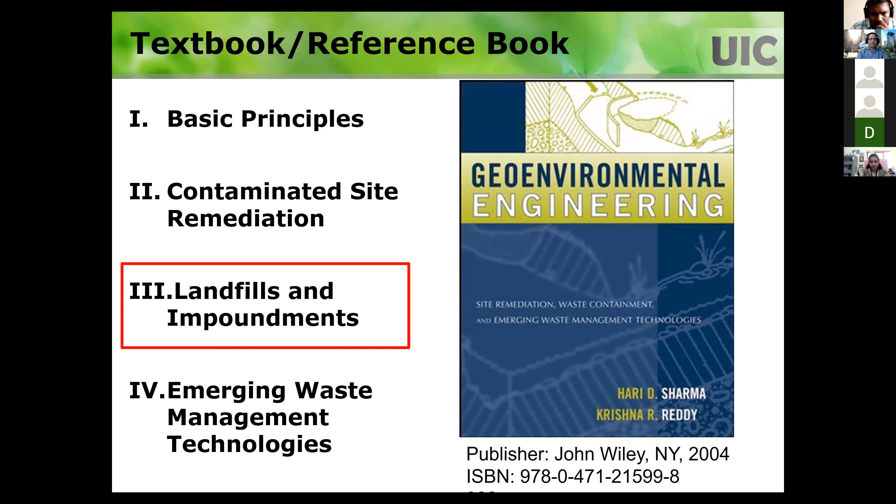And this short course is to deal with the landfills and impoundments, which is in part 3 of this book. In part 3 of this book, these are the chapters. Chapter 15, sources and characteristics of the waste; landfills regulations, siting and configurations; waste containment liner systems; leachate collection and removal systems and liner design; final cover systems; gas generation and management; groundwater monitoring; surface impoundments; beneficial use of waste materials and recycling; end use of closed landfills; bioreactor landfills.

So the way these chapters are organized is, these chapters go in a logical sequence. First of all, you need to know what is the waste, then you need to know the regulations, siting, and you need to know about liner systems, leachate collection systems, final cover systems. So it provides a logical sequence of the topics. So if you're not familiar with landfills, this is the good way to get everything organized.

Because even when I was a student, my professor, the first day he was talking about the liners, and I didn't have any idea before what it takes to study landfill liners. So you need to have a lot of background about types of waste, regulations, the requirements and so forth. So in case you are trying to teach this as a course, I highly recommend you to follow this logical sequence. And I teach a course called Design of Landfills and Impoundments at my university. I actually talk about all these topics. So this is my course syllabus.

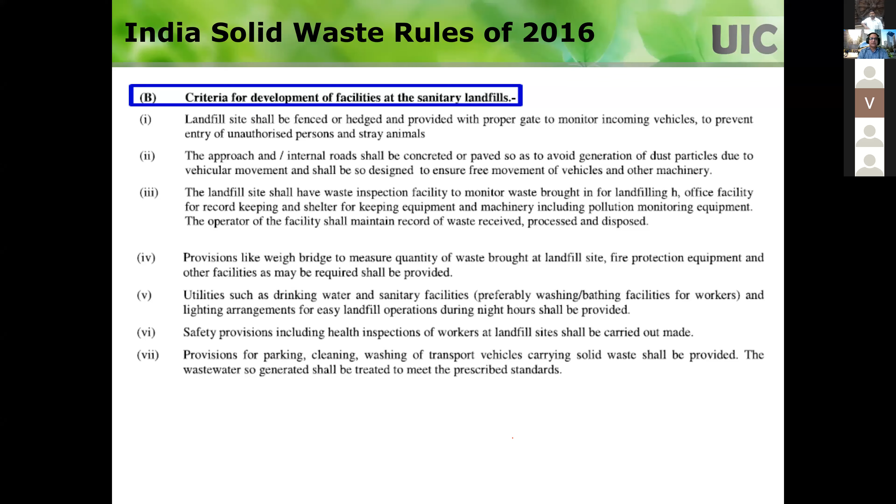And these are all the things that I mentioned: criteria for water quality monitoring, criteria for ambient air quality monitoring, criteria for plantation at landfill sites, criteria for post-care, closure and rehab of old dumps. So you need to have an idea of what the central government and the Central Pollution Control Board regulations are. So I want everyone to read this. Anyone working on landfills in India, students, researchers, practitioners, must know these rules.

From working in this field for many years, I'm not sure about the scientific basis for some of the rules. In my opinion, some rules seem to be questionable, but those kinds of things happen in every situation. Now, I'm more familiar with the U.S. laws, so you can compare and contrast. The best thing you can do is read about the Indian rules and regulations, then compare with the U.S. regulations and see where the differences are. That would be a good exercise for students.

So this is the definition of solid waste according to the US EPA. In the physical sense, you think solid waste means solid, right? But that is not true according to this definition. Solid waste includes solids, liquids, semi-solids, even contained gaseous materials. I always have a hard time when I explain the solid waste definition in this course. Solid waste doesn't mean it's a physically solid thing. It could be liquid or semi-solid. That's the definition the US EPA has, and we follow that in the US for our practice. So don't take it literally that solid waste means really solid.

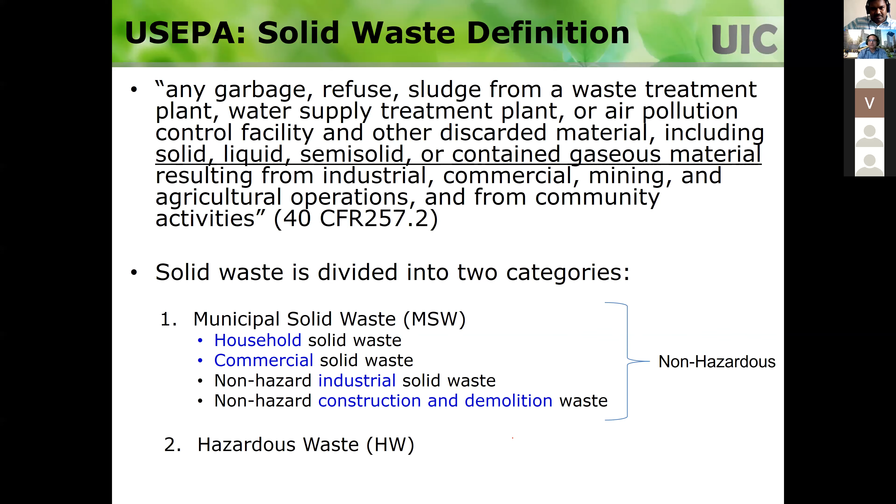Solid waste is a very generic term, and it can be divided into two categories. One is called municipal solid waste, which could be coming from households, commercial facilities, non-hazardous industrial, and non-hazardous construction and demolition waste. All that combined together you can call municipal solid waste. If it is not municipal solid waste, then it's hazardous waste. So you have only these two choices: municipal solid waste, non-hazardous, versus hazardous waste. We don't call it non-hazardous waste, we call it municipal solid waste. You need to be very clear with this because it makes a huge difference in how you manage this waste.

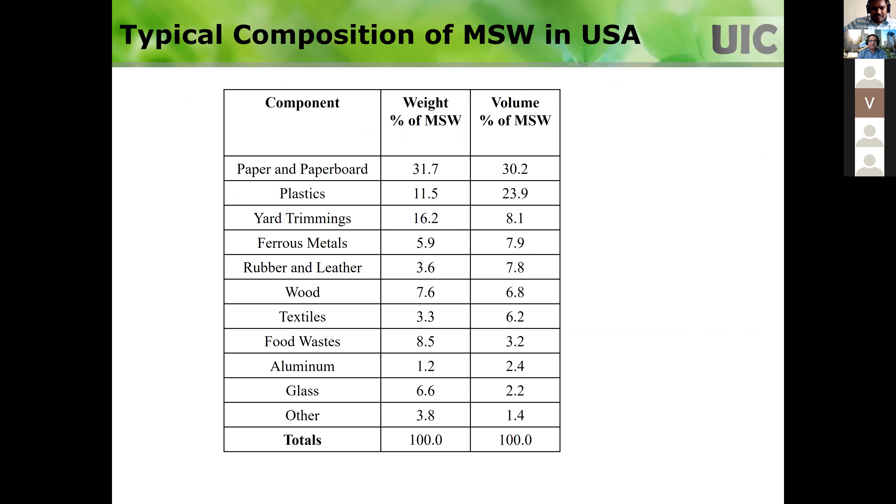So this is typical composition of municipal solid waste in the US, and you can find these numbers changing depending upon the source you look at. You will have these kinds of numbers for every other country, this is just an example. So now the question is, how do I know if the waste is hazardous or non-hazardous? Let's say I don't know where it came from, or it came from all kinds of industries and it's mixed stuff. How do I know? So US EPA has given this definition of what hazardous waste is.

So what we do is we do this test and see if it meets these requirements, then we call it hazardous waste. If not, we call it non-hazardous waste. So what are the things that you should look for to characterize the waste, to determine if the waste is hazardous or not? If one of these criteria follows, then it's called hazardous waste.

Well, first thing is ignitability. You need to look at it, if the waste is ignitable. Second one is corrosive. Is it corrosive or reactive or toxic? So if any of these characteristics are exhibited by your waste, then it's called hazardous waste. Not necessarily all of them have to be followed. If it is ignitable and everything else is fine, then it's still called hazardous waste. So the point, I hope I made it clear, any one of the following characteristics, it could be all of them, or at least one of them, then it's hazardous waste.

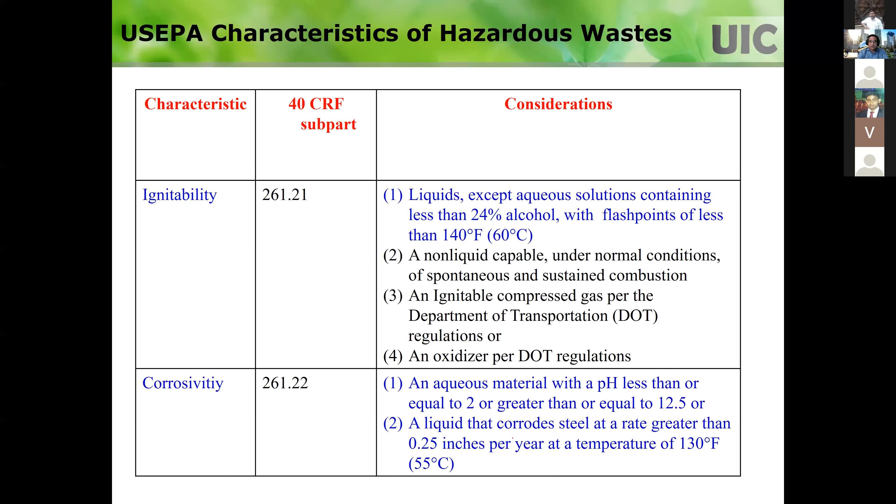So how do we test these characteristics? First one is the ignitability. So you look at this one. There's more explanation here. For example, flash points of less than 140 degrees or 60 degrees centigrade, then it's ignitable. Corrosivity, you can see pH is less than or equal to 2 or greater than or equal to 12.5, then it's corrosive. So it automatically becomes a hazardous waste. Okay. So if one of them is satisfied, you know that it's hazardous waste.

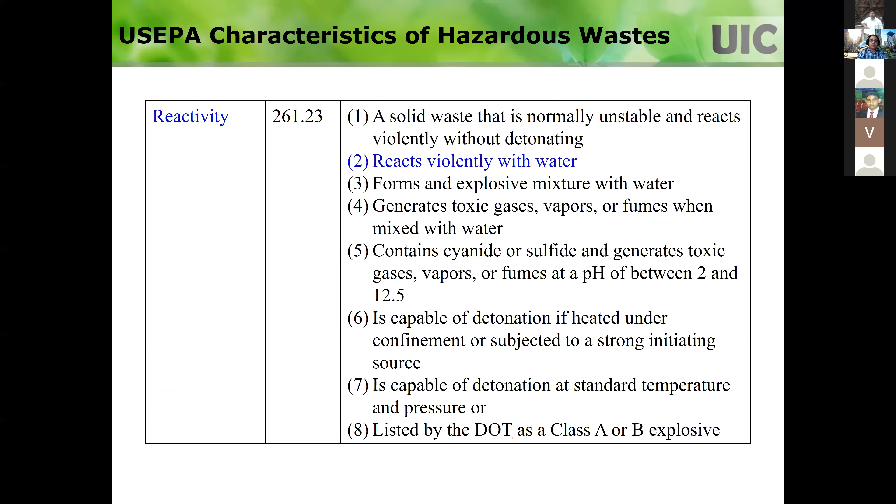But let's say these are okay. Then you look at reactivity. Again, I've given you the description about how you test for reactivity. So in common sense, if it reacts violently with water; there is a descriptive way of how you characterize the reactivity. And then the last one is the toxicity. How do you check the toxicity? You do the TCLP test, toxicity characteristic leaching procedure test. This is the procedure in the table. This goes in details. Everybody knows what the TCLP test is these days.

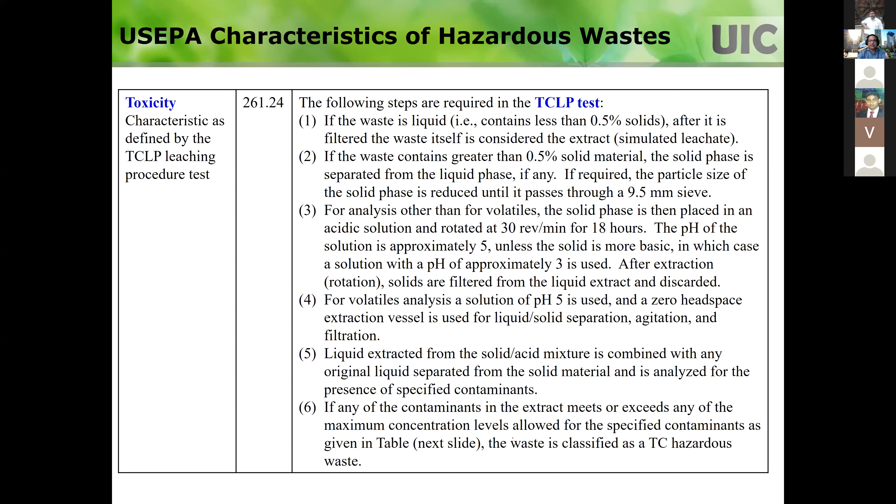So not all of them, even one, for example, lead, right? If the lead concentration is more than 5 milligrams per liter in your leachate, then it becomes a hazardous waste. Let's say everything is fine, except the leachate concentration is more than 5 milligrams per liter. So it becomes a hazardous waste. So then you cannot use the municipal solid waste landfills. You have to send this waste to hazardous waste landfills. So it's a totally different game that you have to play depending upon whether the waste is hazardous or non-hazardous. So the municipal solid waste is the non-hazardous waste that comes from residences, industries, institutions and other things. So we have an engineered waste containment system.

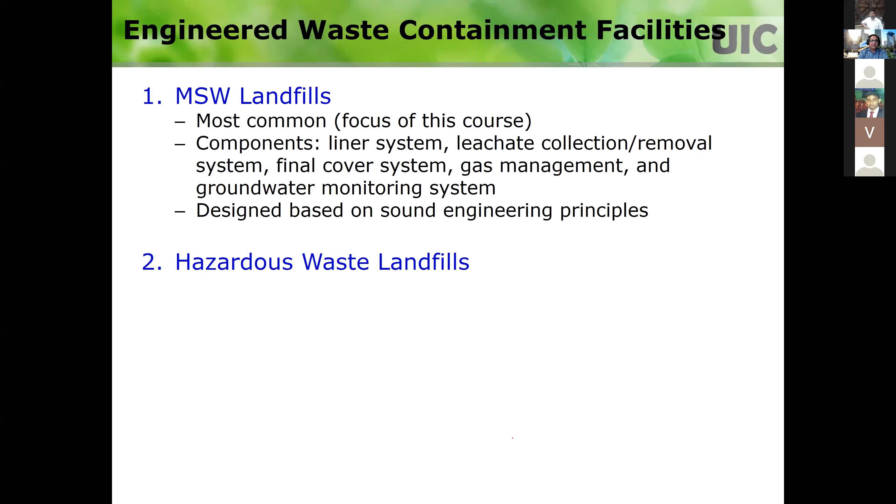So MSW landfills have a liner system, leachate collection and removal system, final cover system, gas management system, and groundwater monitoring system. As per the regulations, you need those things. This is not my way of thinking that these are good for a landfill to have. No, these are the minimum requirements that you have to have. And you have to design all these things based on sound engineering principles. So if the waste is characterized as hazardous waste, then you have to do all these things that you do for municipal solid waste landfills.

But you have to introduce a lot of redundant design. Instead of a single composite liner, you have to have a double composite liner in hazardous waste, because you don't want to take any chance of the contamination going into the subsurface. So basically, you follow the same design methods as municipal solid waste landfills, but you introduce a lot of redundancy. In municipal solid waste landfills or hazardous waste landfills, you cannot dispose of liquid waste. MSW landfills, you cannot have liquid waste. So if you have a liquid waste, the only way that you can dispose of it is in surface impoundments.

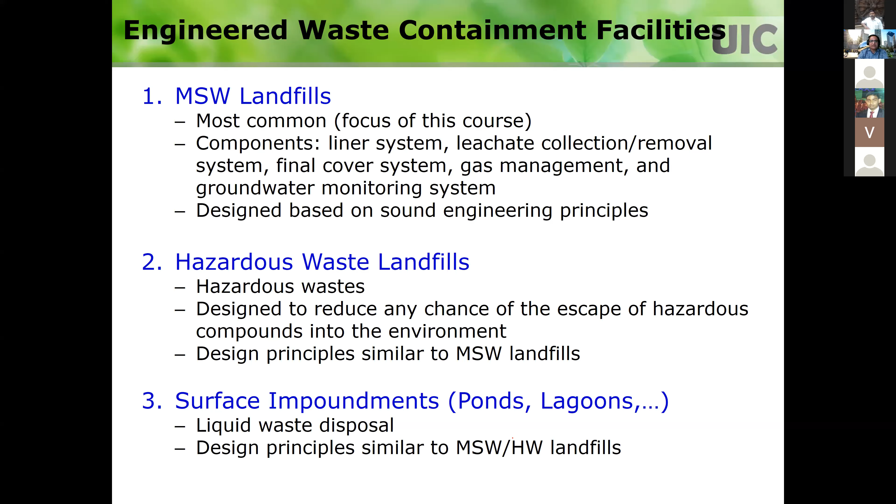So MSW landfills and hazardous waste landfills will not accept any waste that has excessive moisture. They do the paint filter test, and if it does not pass, then you cannot dispose of that waste in a landfill. So if you have liquid waste, then you have to put it in surface impoundments, or there's different terminology for these: ponds, lagoons, different things.

Just showing the schematic of what a municipal solid waste landfill looks like. Let's say you have a geological formation like this one, and then you have a liner system at the bottom. You excavate down depending upon how much capacity you need, then you construct the liner system, then you have a leachate collection system, and then you fill in the waste. That's called operating conditions.

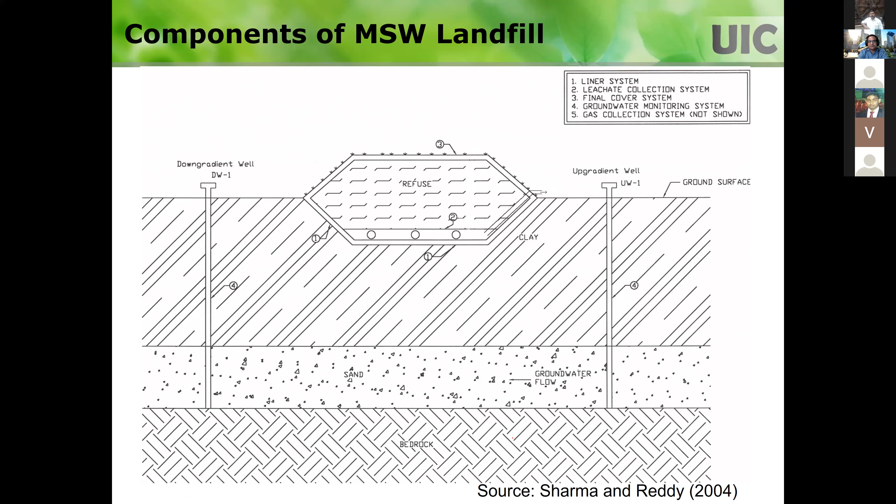Once you fill it up, then you close it with the final cover, and you always have to monitor the groundwater at the site, even before you start constructing the landfill, to establish the baseline groundwater conditions. So you will have a set of monitoring wells on the downgradient side and one set of wells on the upgradient side, so if there is any leakage from the landfill, you will be able to detect it. And you also have to have gas collection and removal systems. Okay, so those are the typical things.

So just like the solid waste rules of India, the Subtitle D regulations of RCRA also have specifications on the minimum requirements for municipal solid waste landfills. I'm not going to focus on hazardous waste landfills and impoundments. Basically, if you know how to design a municipal solid waste landfill, you could apply the same engineering principles to design hazardous waste landfills and impoundments. A lot of times in my courses, I spend a lot of time on municipal solid waste landfills, and then at the end I tell how you change things for hazardous waste landfills and impoundments.

So these are the requirements that you see in the specifications. As I mentioned, this would be our starting point. This is my building code, right? The code that I need to follow for designing a landfill. These are as per the US EPA, but you have the same kind of things in the Solid Waste Rules of 2016 in India. So the location restrictions: where can you have a landfill? It's called locating a landfill or siting a landfill. So you have to follow these requirements.

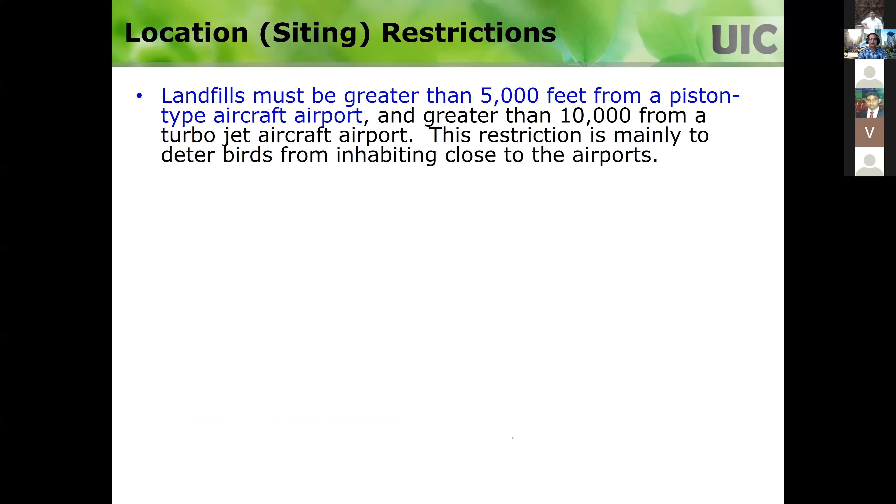For example, in the US, you cannot have any landfill within 5,000 feet or 10,000 feet of an airport, depending upon the flights that come in. Landfills should not be located in floodplains. Landfills must not be located in wetlands. It will give you all these things. Must not be located within 200 feet of a fault area. Landfills cannot be located in seismic impact zones, because you have seismic conditions. Landfills must not be located in unstable site subgrades. So you have all these requirements on where to put a landfill, and you have to meet them.

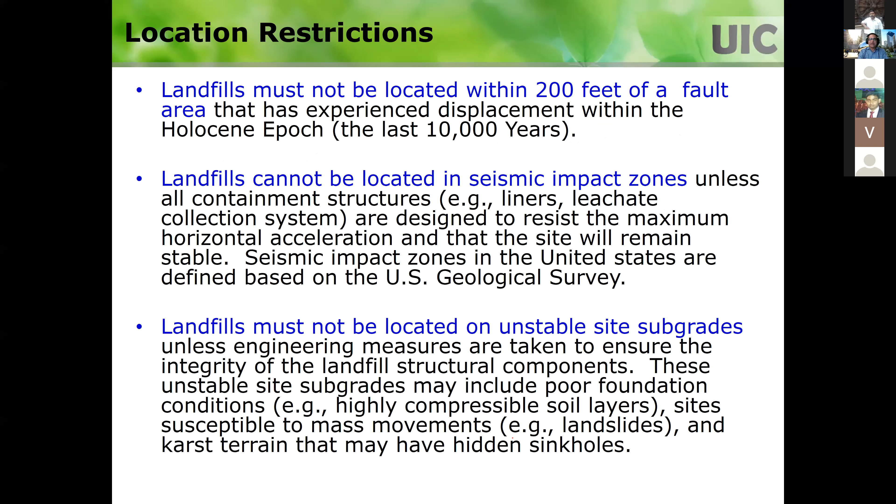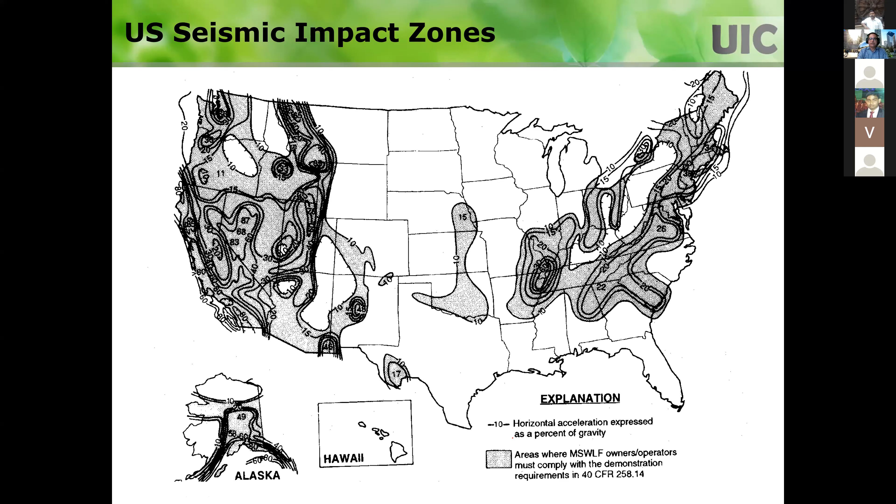For example, seismic impact zones: every country has seismicity maps. This is the map of the US, showing the seismic impact zones. If you have a landfill in non-seismic zones, then you don't have to worry about it. These shaded areas are seismic impact zones, so if you have a landfill in those locations, then you have to do the stability analysis for seismic conditions. The regulations tell you what extra analysis you have to do. And those are the federal regulations.

Federal regulations are like central government regulations in India. Then states could have different regulations. I live in a state called Illinois, and Illinois has different regulations. I don't have to go into detail, but these are stricter than the federal regulations, or have additional requirements. So the federal requirements are compulsory, and you can have stricter or additional requirements at the state level or even the local level. For example, if I'm going to have a landfill in Hyderabad and the Hyderabad Municipal Corporation comes up with additional requirements, then those also have to be followed. So that's about location requirements.

Operating criteria: you cannot accept hazardous waste, even by chance. So there should be certain testing protocols to make sure of that. First of all, you need to look at the source.

If you have an unknown source, then you have to analyze if the waste is hazardous or non-hazardous. Only non-hazardous waste is taken in a municipal solid waste landfill. So if it's a hazardous waste, then you send it to a hazardous waste landfill. A hazardous waste landfill is built with a lot of safety precautions, so it costs a lot of money. So they have a tipping fee, right? In the US, every time you take the waste to a landfill, they charge you by weight. So hazardous waste costs a lot of money to dispose compared to municipal solid waste.

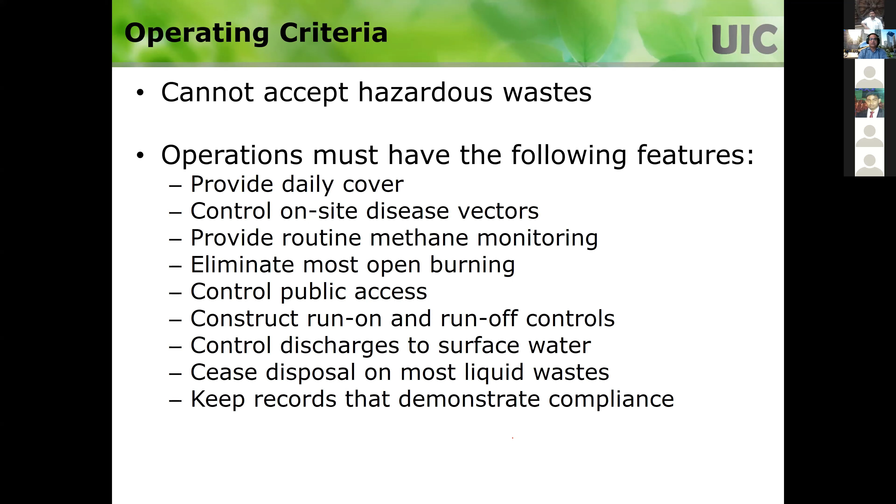So you need to keep records that demonstrate compliance. So these are all the requirements put on the operator, and the operator has to conform to these operating requirements. Again, it's not an option, it is by regulations. If the operator is not following any of those operating criteria, he or the company will be shut down, or they will be responsible for all the damages, and sometimes they go to jail also.

So, design criteria. The most important design criterion is the liner system. I know a lot of people do research on liners, okay? And the first thing that I will tell them is, look at what is the requirement for the liners. Don't randomly do research on liners without knowing what is the minimum required, right? So in the US, and many countries adopted a similar thing, basically we need 2 feet of compacted soil with less than 10 to the power -7 centimeter per second. We use the feet system, so you can convert this to maybe 0.6 meters.

And then on top of it, you need to have a geomembrane, a flexible membrane; if it's HDPE, 60 mil minimum. And then you need to have a leachate collection system on top of it. Basically, you have a drainage layer or the pipes. It doesn't really say anything about this one. So what is in the regulations is this, okay? You need to have a flexible membrane liner. You need to have a compacted clay liner. You need to have a leachate collection and removal system.

It doesn't say what it should be, but it should ensure that leachate does not accumulate more than 1 foot, 30 centimeters, above the liner at any time during the entire life of the landfill. So typically we will have a drainage layer, a set of pipes, and a system to collect and then remove the leachate, so that we have a 30 centimeter or less leachate head throughout the entire landfill. So this is what you need to look at. If I'm doing research on it, what can I do better than this, right?

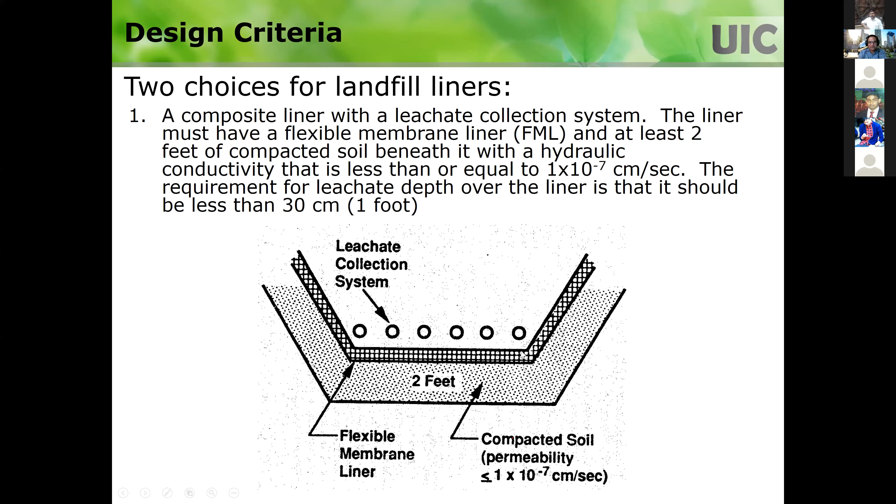Whereas if the shear strength is not enough, you can do something. You can flatten the slopes, do something for that one. But permeability is a requirement that you cannot do much about. So you have to make sure that your material has that permeability. So they give you a second choice. So I like these regulations.

Okay, regulations give you the prescriptive solution, kind of what is the standard solution that you start with, but also they give you the option. Okay, this is the second choice. In the second choice, the regulations don't want to say anything about the liner system. You come up with whatever you want, right, as a liner.

But the only criteria that I have, and I'm talking from the regulatory agency point of view that is seeing your design, they say that, okay, this is my compliance boundary. Generally, it is the waste boundary or 100 feet or 500 feet from the waste boundary. That's my compliance boundary. So if I draw a line, go down to the uppermost aquifer, and then look at this point, that's my compliance point.

So I need to demonstrate that at this compliance point, my contaminant, for example, if it leaches and goes down, and then in the groundwater it might flow horizontally, when it comes to this compliance location, concentrations do not exceed these standard levels. So these regulations tell you these are the contaminants and these are the concentrations. So you come up with whatever you want. So I love this option, right?

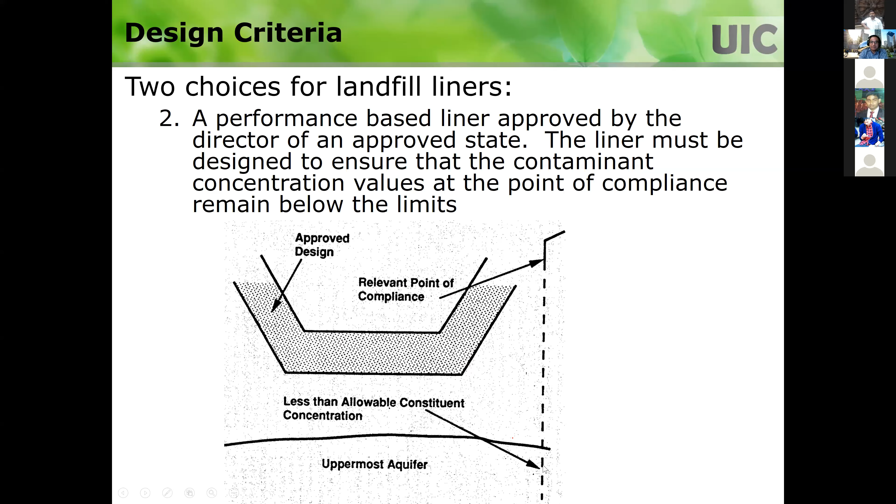So then groundwater monitoring and corrective action. The uppermost aquifer is the most important one. You want to monitor it all the time. So you need to have a set of monitoring wells, and you need to have a sampling and analysis program. And they tell you what kind of chemicals you need to analyze. It's called detection monitoring. And then if you find some chemicals exceeding certain levels, then you go into assessment monitoring. In assessment monitoring, you need to add more chemicals and monitor those things, and then do the statistical analysis.

And if you see that these chemical concentrations are exceeding in the groundwater, definitely due to leakage from the landfill, then you need to have a corrective action. Corrective action is remediation of the groundwater. So you really need to do something. In landfill cases, once you fill in the waste, you cannot do anything to the liner. So a lot of times you have to put in slurry walls or other things. So that's why you need to be extremely careful in the design of landfill liners, because there is no second chance to fix it. Because once you put in a lot of waste, how can you go back and replace the liner?

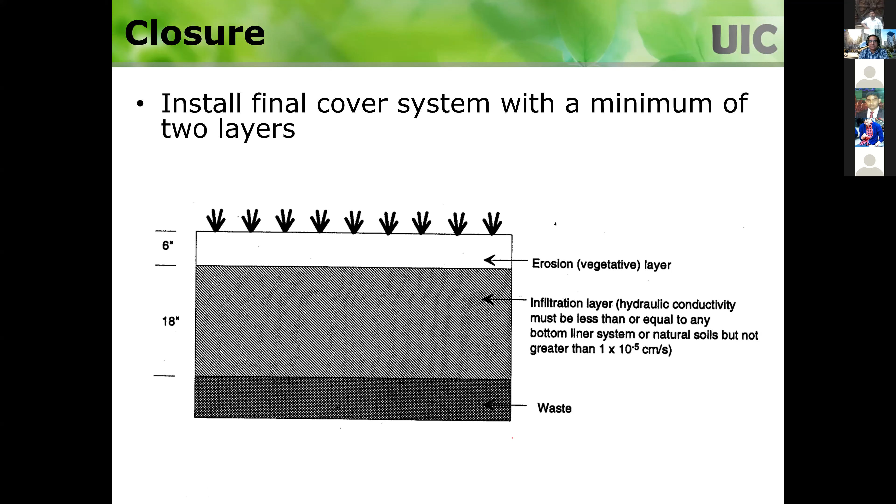Even in the US, I worked on some old landfills where we didn't have to use the geomembrane in the final cover, and we used a barrier layer, drainage layer and vegetative cover layer, and we closed the landfills. So then you need to have a closure plan. This is right in the beginning of the landfill, even before you construct it. You need to have a final cover design. Everything should be decided upfront.

So per the regulations, within 30 days of the final placement of the waste layer, you need to start putting the closure cover. Post-closure is another important thing. Once you put the final cover, the landfill operator cannot walk away. The landfill operator has the obligation to monitor the landfill for 30 years. And you need to continuously document how the landfill is performing, to make sure it's performing the way it's supposed to.

So you need to make sure that the final cover is maintained properly and it's performing fine. And you need to think about how leachate collection is happening, how groundwater monitoring is happening, how gas monitoring is happening. So you need to document all these things and submit them regularly to the regulating agency so that they know things are working fine.

Now, post-closure is 30 years after putting the final cover. What if the landfill operator disappears, announces bankruptcy or leaves the country, whatever? Because of that uncertainty, the landfill operator has to deposit money during the landfill operations. That's called the financial assurance criteria.

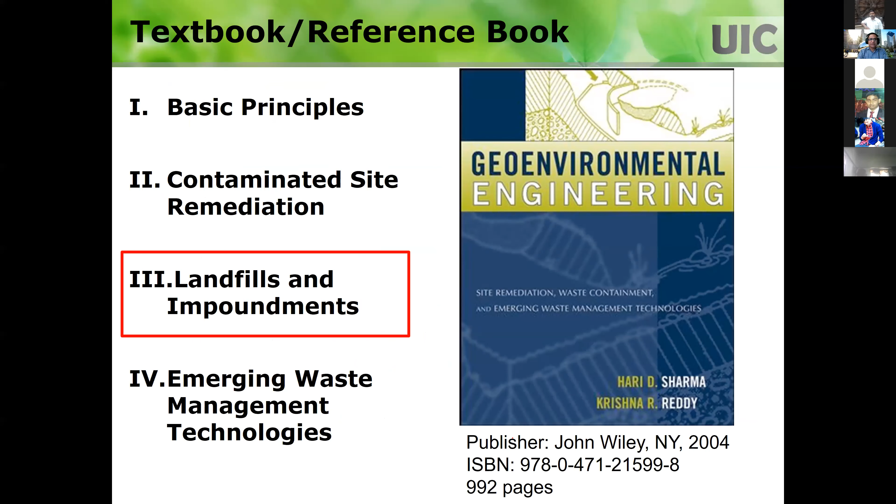So I want to again reemphasize, if you are starting or if you are teaching, I would recommend you get hold of this book and see this section. These are all the different ways that you design different components in a logical sequence. And in the beginning of every chapter, I have specific regulations mentioned. So you start off with that: what are the minimum regulations that I need to follow? And then you build on the analysis and then perfect that design. So I would highly recommend you go through these things if you're embarking on anything to deal with waste and landfills.